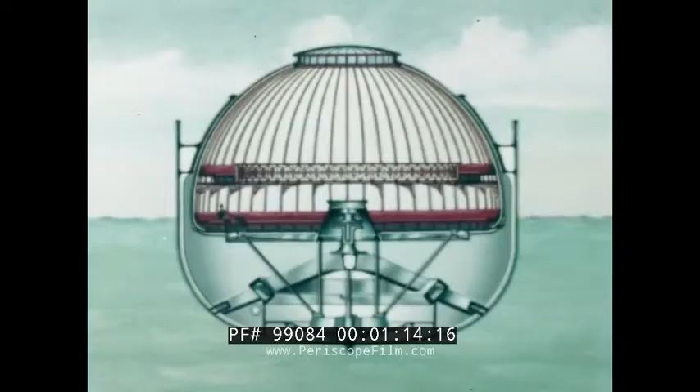Practical invention was Bessemer's answer to any problem. He was a bad sailor, so he produced the remedy, a passenger saloon that remained upright however much the ship rolled. It was not a great success, but at least it was evidence of his imaginative brain.

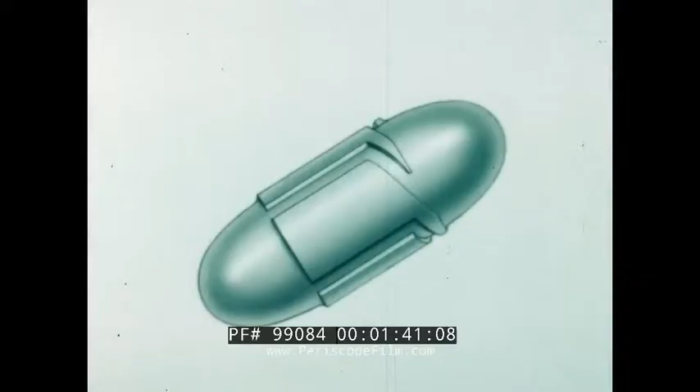He was 41 when the Crimean War began, and he gave his mind to artillery problems. He produced a shot that could be revolved by the exhaust gases through the smooth-bore cannon of the day. It was grooved, and Bessemer showed its effect with a model.

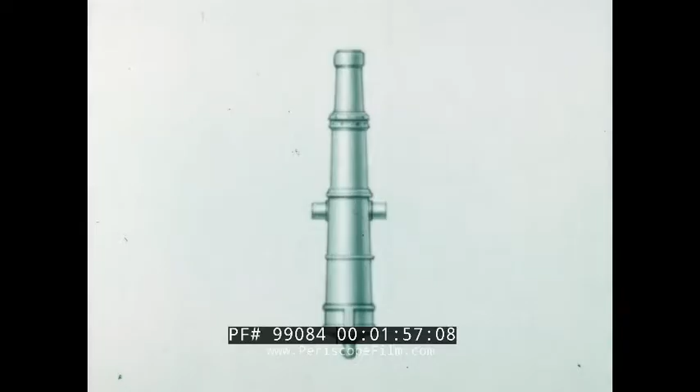The principle was sound, but the iron guns of those days could not stand the increased pressure. Bessemer's reaction was to find a stronger metal, which he cast into gun barrel molds. He was turning his genius to what was to become his life's work, steel.

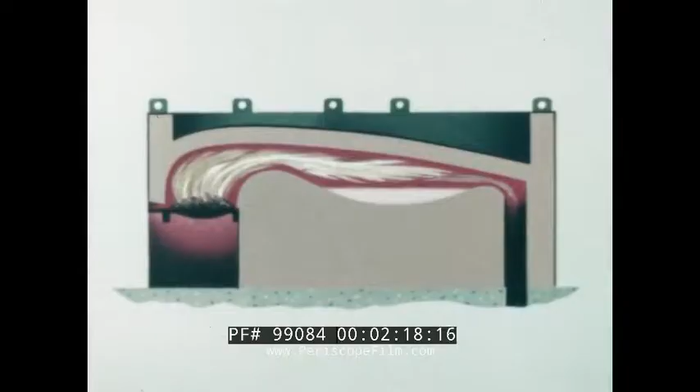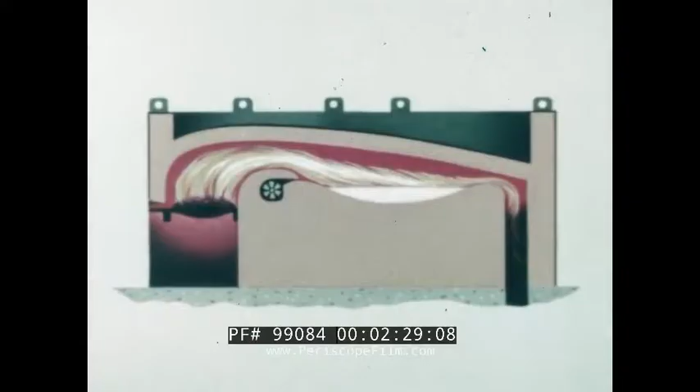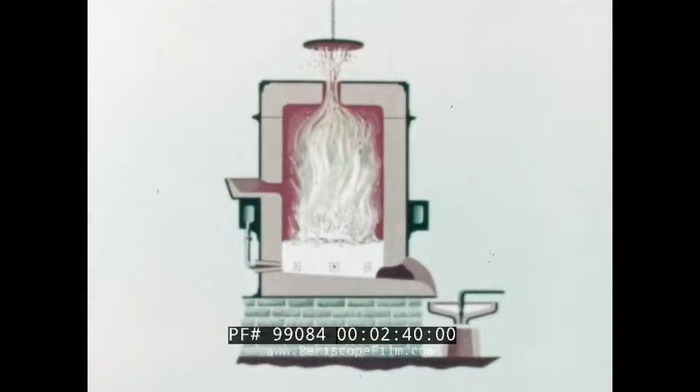Developing the old puddling furnace, he found that a current of air blown over the surface of the metal not only raised its temperature, but helped to remove the carbon and other impurities that made the iron brittle. Soon he was blowing air through the molten metal and found that this by itself produced enough extra heat to complete the refining process. Then, by putting back a controlled amount of carbon, he could produce what he'd been working for, a metal that was hard and strong without being brittle.

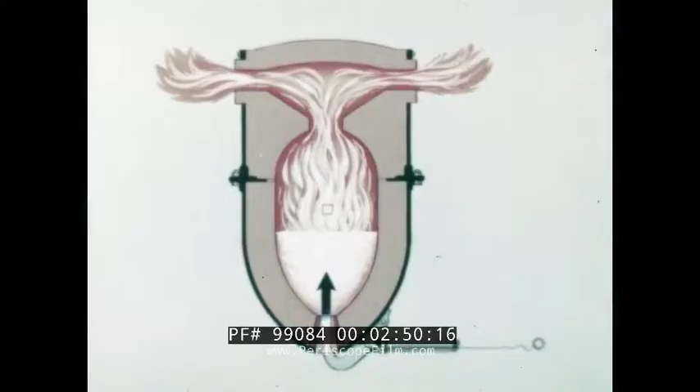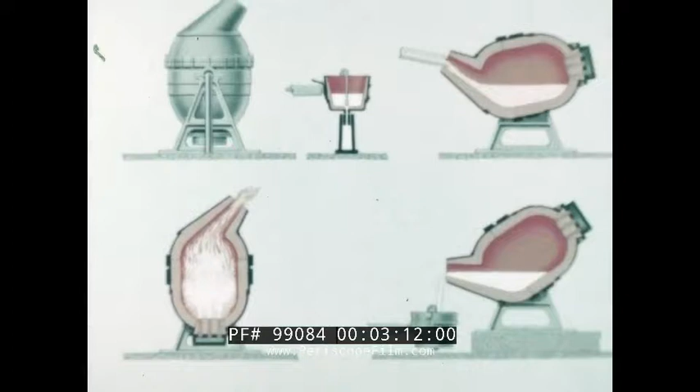Still, he was not satisfied and continued with his experiments. By trial and error, by adapting his old ideas and devising new ones, he eventually developed the converter we know today. He could make steel, acid Bessemer steel, stronger and cheaper, more quickly and in greater quantity than it had ever been made. And he gave Britain such a lead that within a decade, she was producing more steel than the whole of the rest of the world.

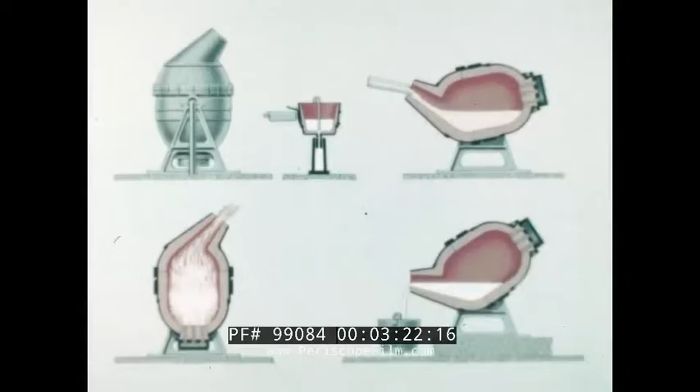His announcement of his original principle 100 years ago is seen now as the beginning of the steel age. Bessemer had his failures. He also had help from men like Mushet and Göransson. But his principle was confirmed here in the Cumberland Hills, where he found the pure hematite ore he needed. A rich countryside indeed, with such beauty on its face and so much treasure in its heart.

Workington is my town, a town built on iron. It stands alone between the hills and the sea. Maybe that's why we're an independent, self-contained sort of people. Like many industrial towns, it's a mixture of old and new. Older terraced houses and newer spacious estates.

Proud of our past and confident in our future, we are generally considered a lively, friendly people. 30,000 of us, living, working and playing together in a community built on our Bessemer heritage. A heritage that has transformed the old ironworks of yesterday into the fully integrated iron and steel works of today.

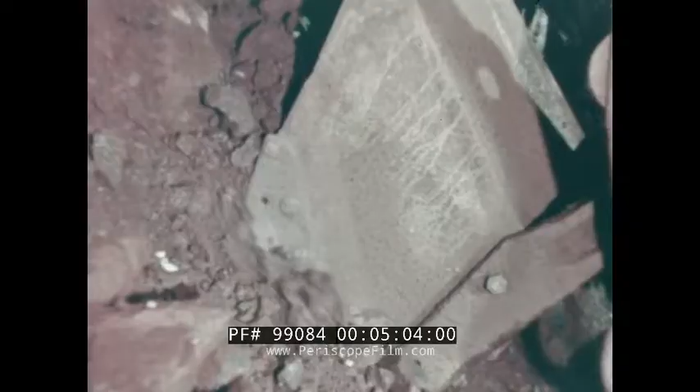To maintain their full capacity, we have to bring in to our own docks raw material from other parts of the world. Yet the basic foundation of Workington still lies under the foothills of the Lake District, where the pure hematite iron ore, which Bessemer sought a century ago, is still being mined.

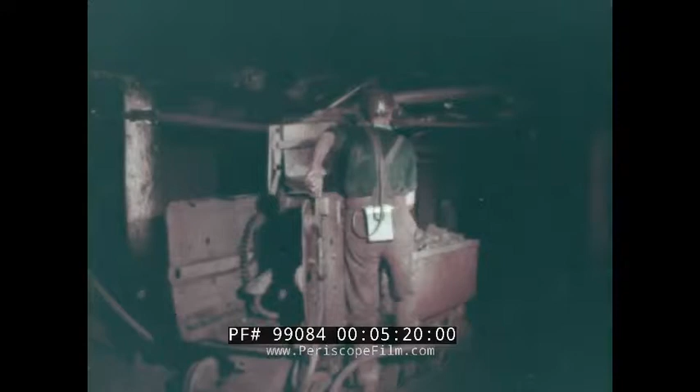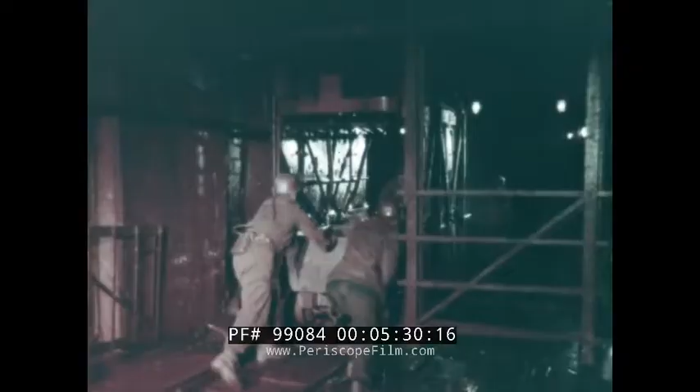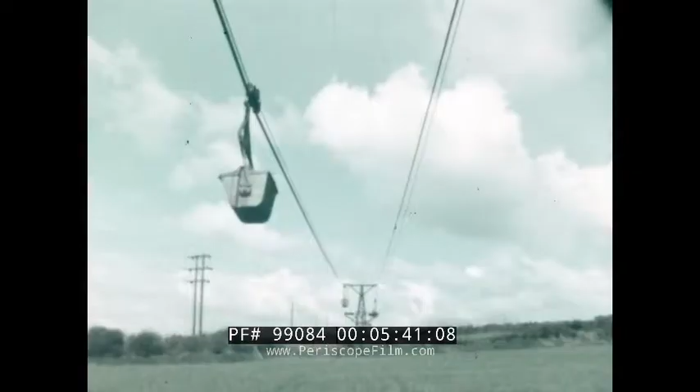After it has lain here for many thousands, indeed millions of years, it gets a rare blow of good Cumberland air on its way to town.

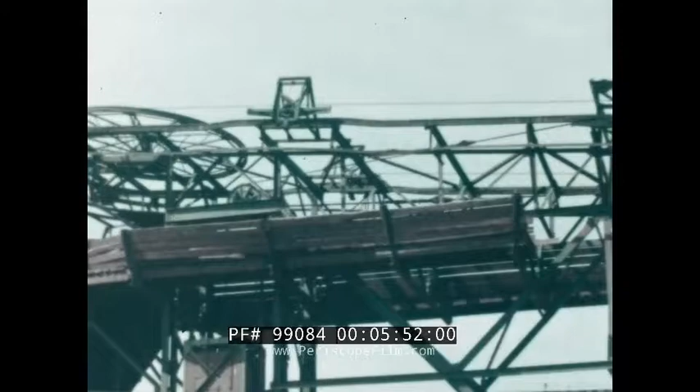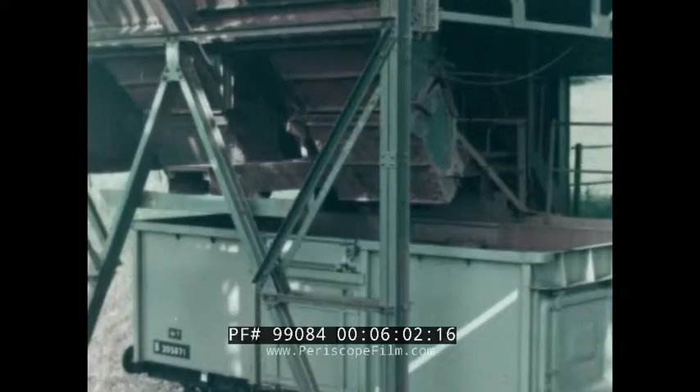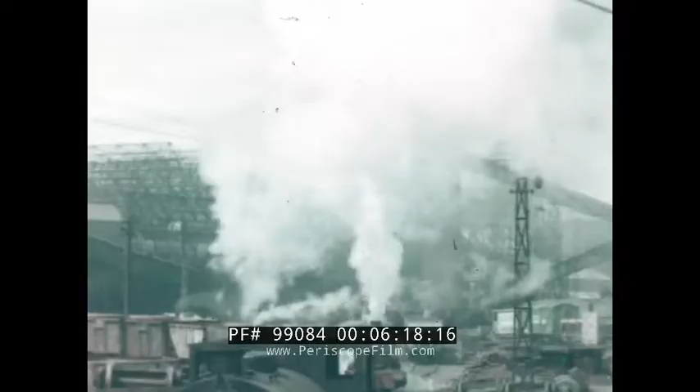In addition to our local ore, other hematite ores are brought from Africa, Sweden and Spain. From mines and docks, there's a steady flow of ore for the blast furnaces. Of course, ore alone does not produce iron. It needs coke, high-grade coke from Cumberland coal, and ovens designed to suit the coal.

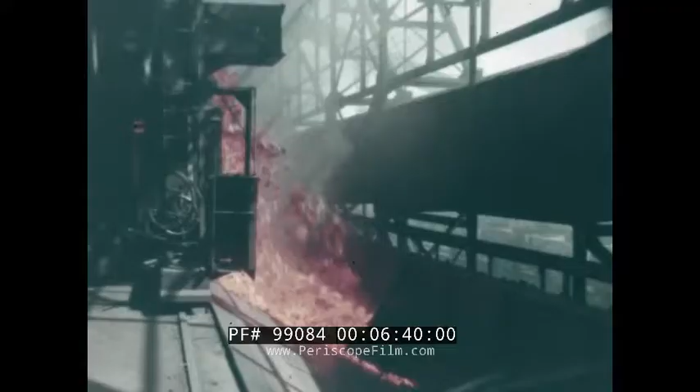Over 6,000 tons of coke a week are produced in 2 batteries of 64 coke ovens. And it all has to be taken along to be quenched under sprays of water.

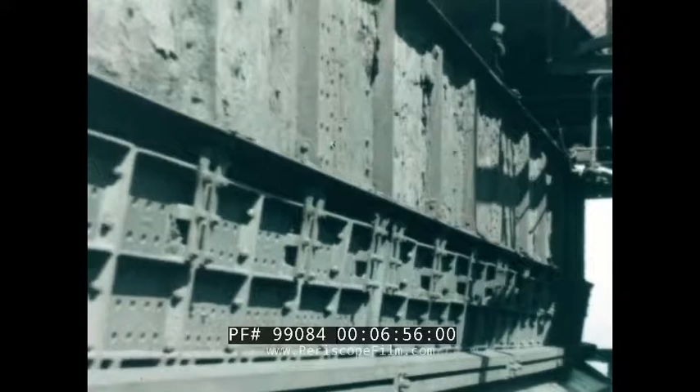The steam cloud formed by the cooling coke is a familiar sight to the townspeople. They know that the coke is going to the blast furnace to be mixed with lime and crushed ore to produce more iron.

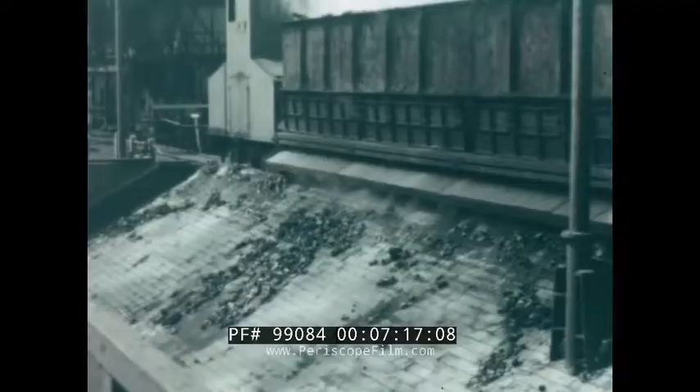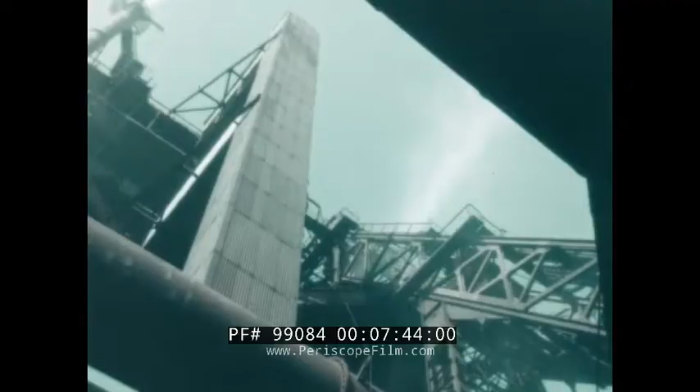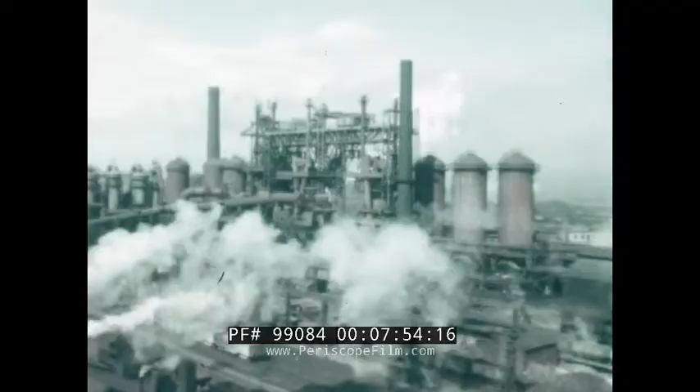The 3 ingredients in weighed and measured quantities go up to the sky in skips. Three blast furnaces working continuously can produce 9,000 tons of molten hematite pig iron every week. Every 4 or 5 hours, a furnace is tapped. The molten iron runs out, and the mastery of man over metal begins.

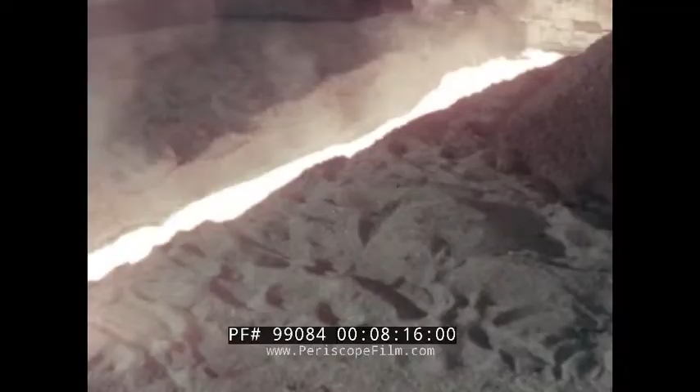On the skill of the blast furnace keeper depends the success of each tapping. For this is not only the story of hard-won metals and the white fury of furnaces. It is also the story of men who have been born and bred to iron and steel. The men who will control and shape this flowing mass until at last it takes its destined form.

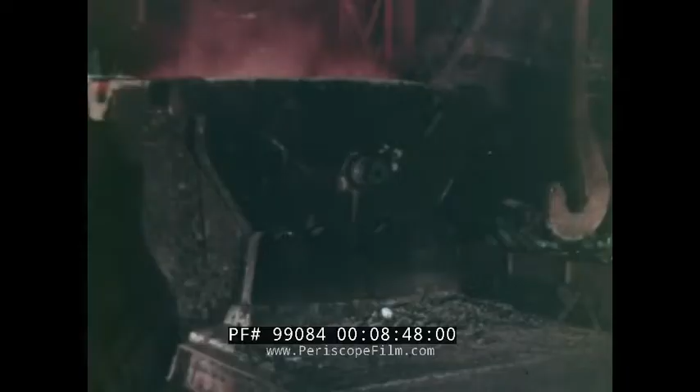Movement control is essential here. Everything must be put in its right place at the right time. From the furnace, the molten iron goes to the Bessemer shop for hot storage. High up, the crane driver looks down and takes charge of the ladle to raise it to the mixer.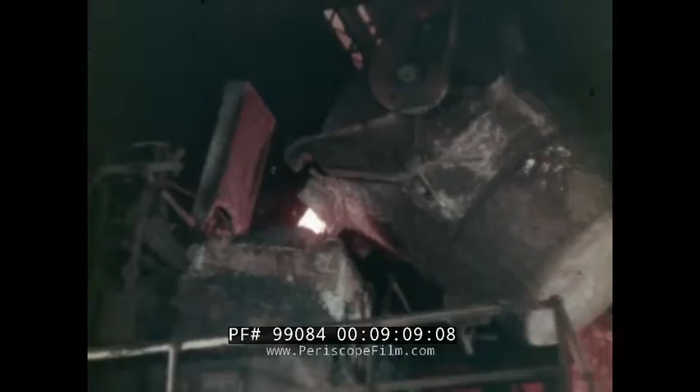The mixer holds 400 tons of molten iron, literally in hot storage. By mixing casts from the blast furnace, it levels out any variations between them. So a uniform quality of iron can be sent on to the converter.

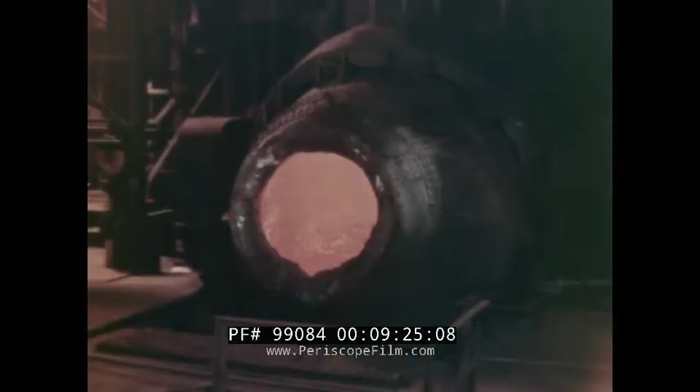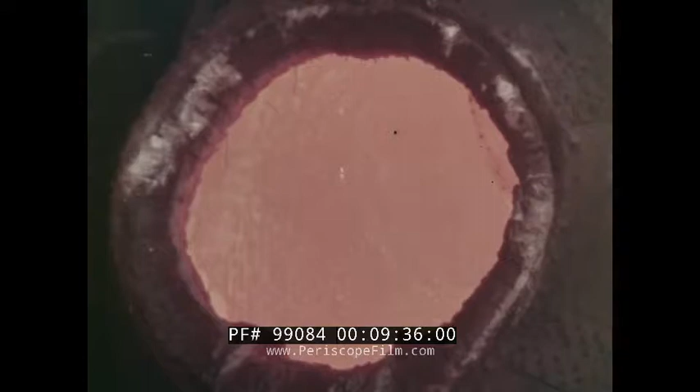The Bessemer converter is a steel shell with its mouth set at an angle. It is lined with silica brick, a chemically acid material, hence the name acid Bessemer. Through these holes, or tuyeres, air is blown under high pressure.

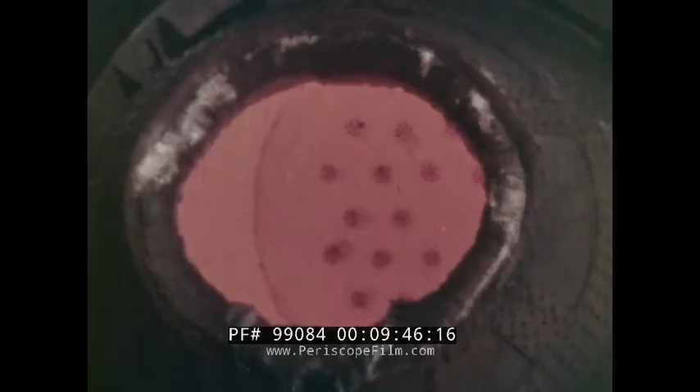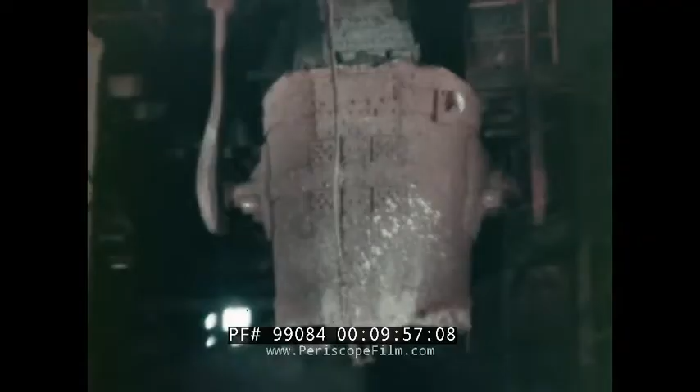The blower, in his cabin opposite, is the kingpin here. He signals when he's ready for a ladle of iron to be brought from the mixer. Indeed, he times every move to keep production flowing smoothly. The shape of the converter allows it to hold the molten metal during filling, so that it is clear of the tuyeres.

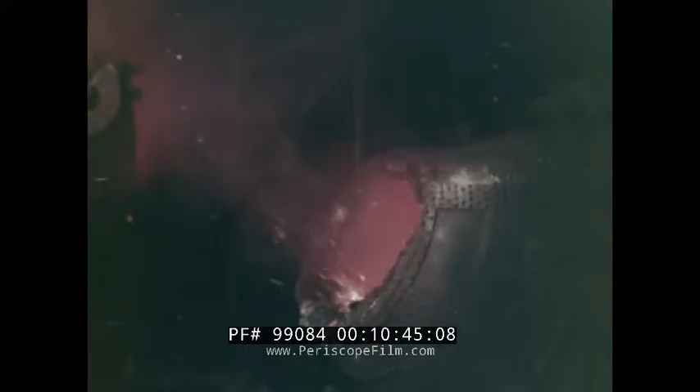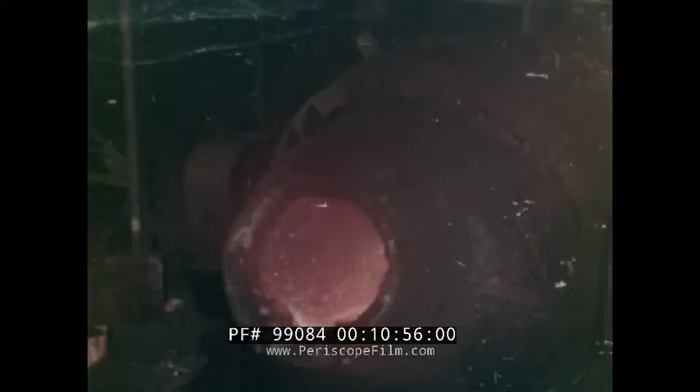When the 25 tons of molten iron is emptied into the converter, the blower turns on the air. The blow has begun, and the air blast sweeps from the tuyeres across the surface of the metal. Though he has many gauges and instruments to help him, the blower's experience and cool judgment will guide the furious clash of air and metal. When the air is blowing at full blast, the converter is tilted up.

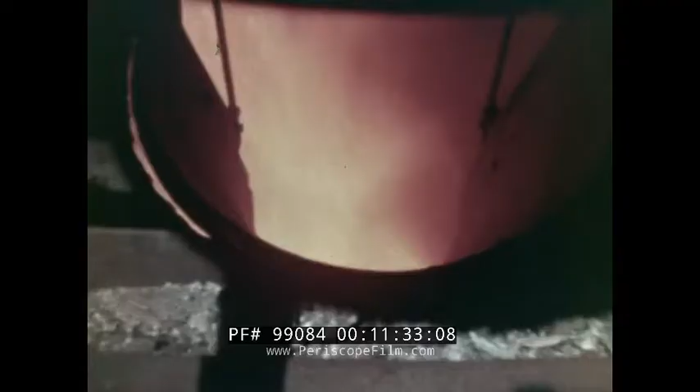The air is going through the metal now and starts to burn out silicon, manganese, and carbon. Keen eyes are fixed on the flame, its changing color indicating what is happening inside the converter. Scrap is used to control the temperature of the molten metal, a vital factor throughout the whole of the blow. Rocking is the blower's version of shake the bottle. It helps to melt and mix the scrap.

The gradual change in the color of the flame means that the silicon and manganese are burning out. As these elements burn, the temperature shoots up and the carbon also begins to burn. Soon, the oxygen in the air, combining with the carbon in the metal, forms carbon monoxide. The result is a fierce flame burning at the mouth of the converter, a warning signal to the blower. Now is the critical period when the flame turns white. Every eye is concentrated on the flame, for the moment to end the blow, when the carbon is finally burnt out, must be judged exactly.

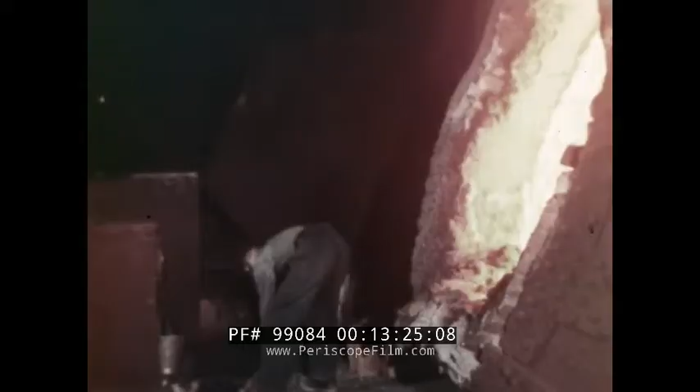The fury of the blow is spent. The molten metal inside has become almost pure iron. To make it into steel, a controlled quantity of ferromanganese is added first. Next, an alloy of iron and manganese, called spiegel, is poured in. This increases the carbon content and turns the molten iron into steel of the right analysis. While the molten metal is being poured, a further addition, ferrosilicon, is charged to the teeming ladle.

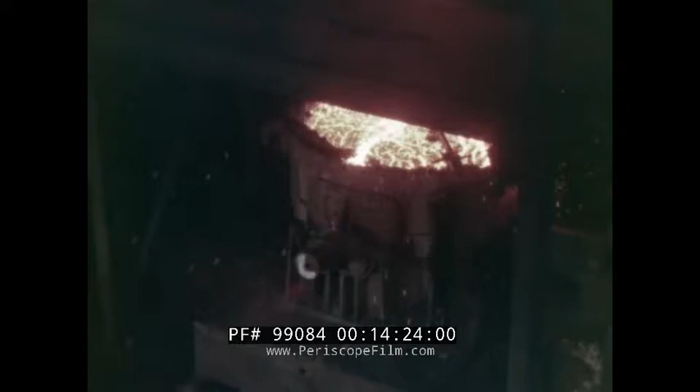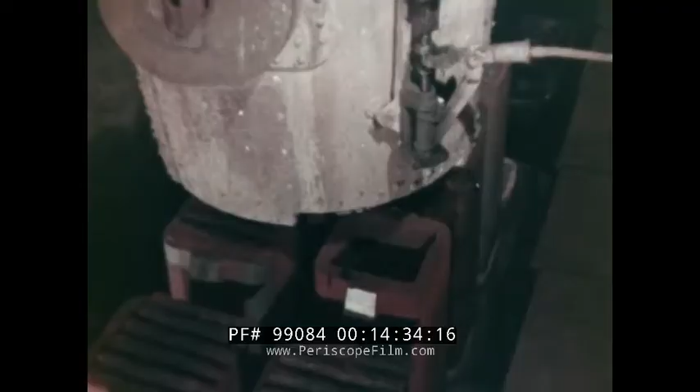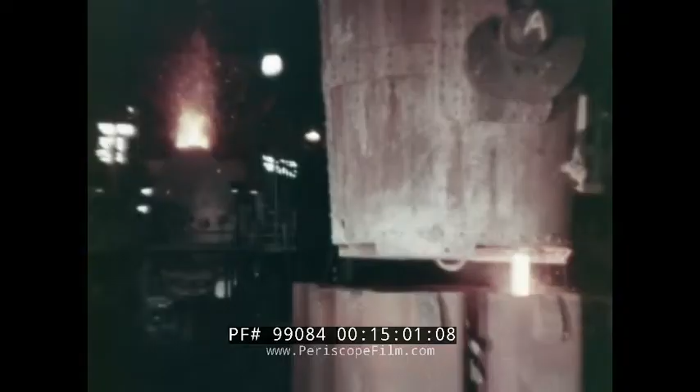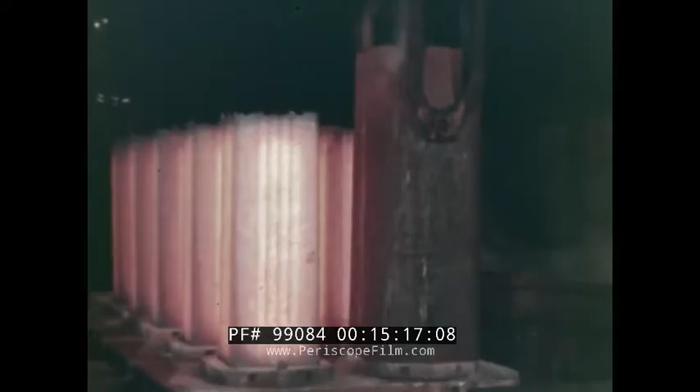Man still controls the flow of metal. Now he must give it a solid, practical shape, one in which it can be worked in the rolling mills. That solid shape is obtained by teeming the steel into ingot molds. You can see here the result and importance of movement control. As the molds are filled, a second converter is already being blown. Further on, molds from the previous teeming are being stripped.

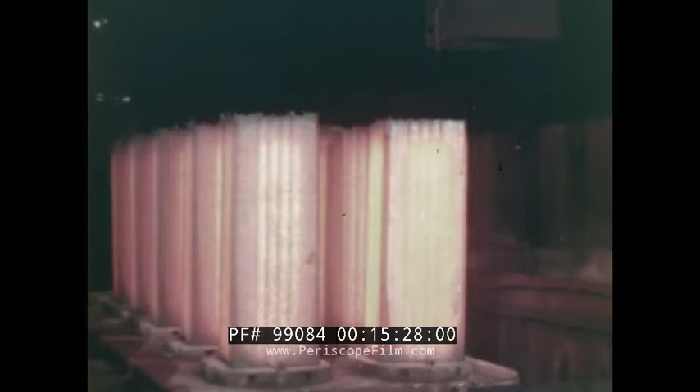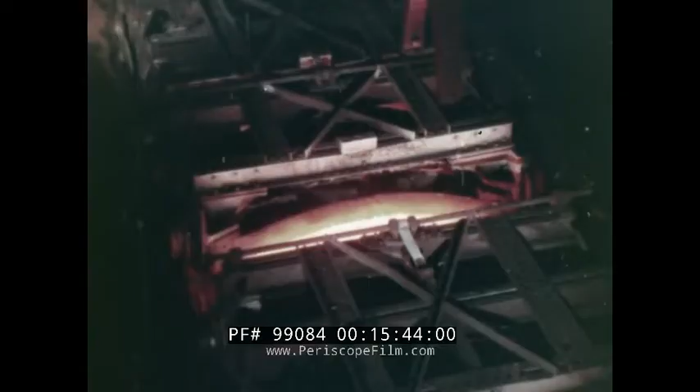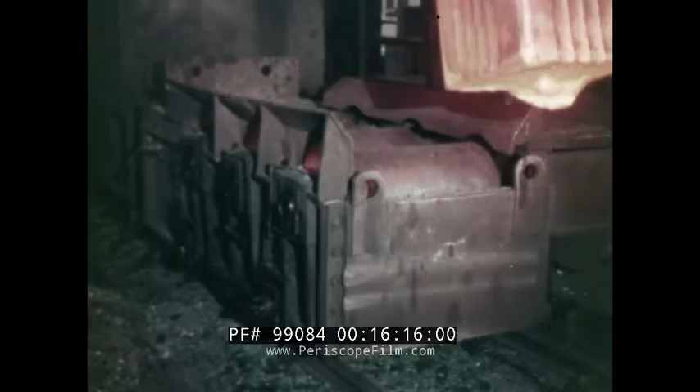These go to what are known as soaking pits, which already contain ingots stripped earlier. Soaking means exactly what it says. The ingots are literally soaked with heat for about 2 hours, reaching a temperature of 1200 degrees centigrade before they are ready and malleable enough for the rolling mills. The flame of the converter, lighting up the Bessemer shop, is the very spirit of the works, always ready to draw our eyes and our breath.

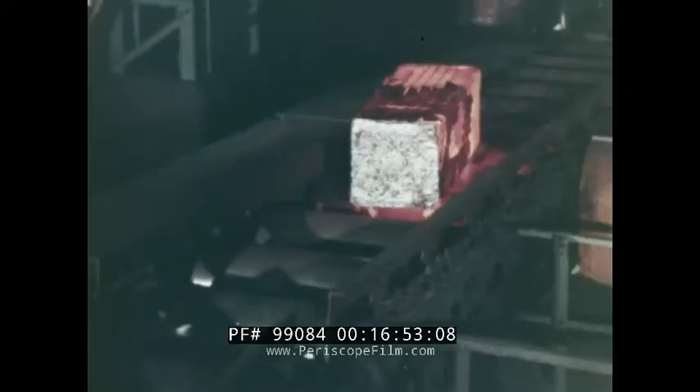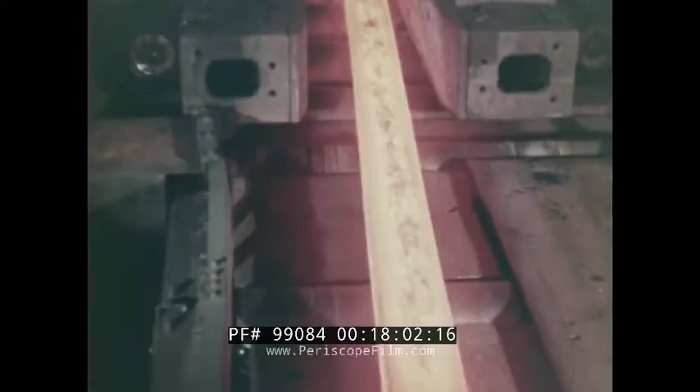The ingot will become a steel rail, and the quaintly named chariot takes it to the cogging mill for the first stage of its transformation. Every backward and forward roll and turn will slowly shape this ingot into what steelmen call a bloom. Above the mill, in the pulpit, men are still the calm and patient masters of the metal. With quiet concentration and perfect understanding, they roll the steel to exact size and of right strength and internal structure. The ingot is now a bloom to be passed on for further rolling.

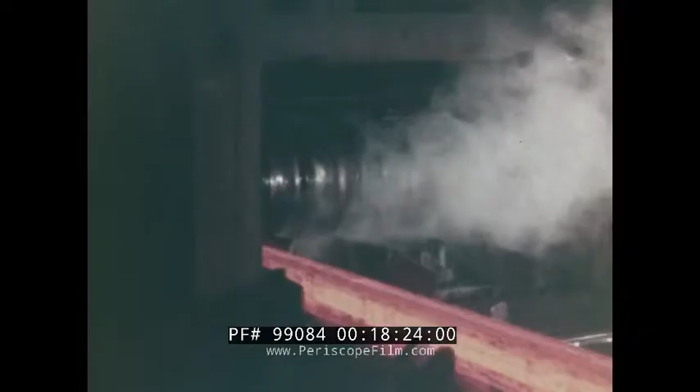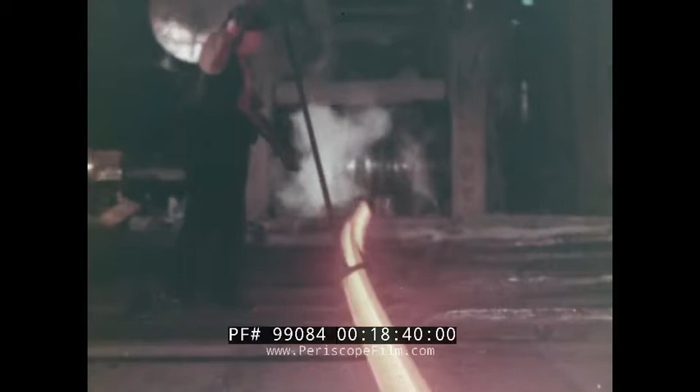They call this the roughing mill. The bloom would probably call it much the same. With each pass, the bloom becomes longer and thinner, and soon it begins to take on the shape of a rail. Roughing being completed, now over to the finishing mill. Men still take a hand in turning the rail, for it has to be rolled sometimes on the flat, more often on the edge. Even the rail seems pleased with its progress, wagging its tail as it passes through.

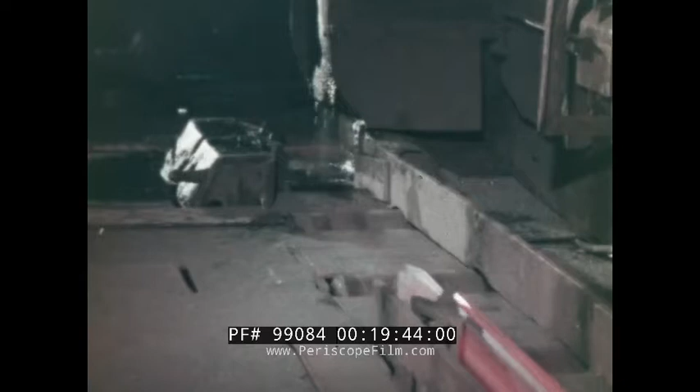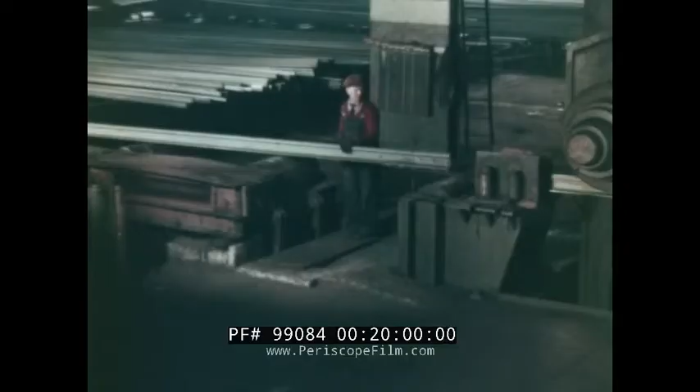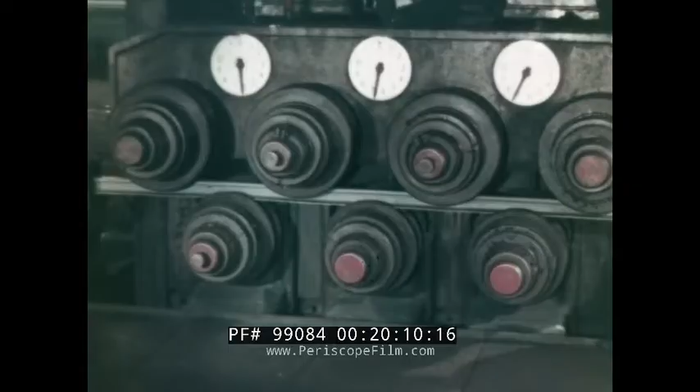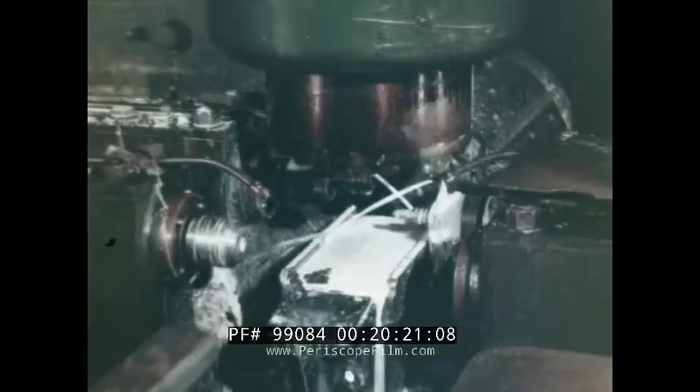In cutting to rough length, allowance is made for contraction during cooling. It can contract as much as a foot. When the rail is a cold 60-footer, it has to be made perfectly straight, so another rolling process smooths out any irregularities. This machine performs the final operations, cutting to exact length and drilling holes for the fish plates.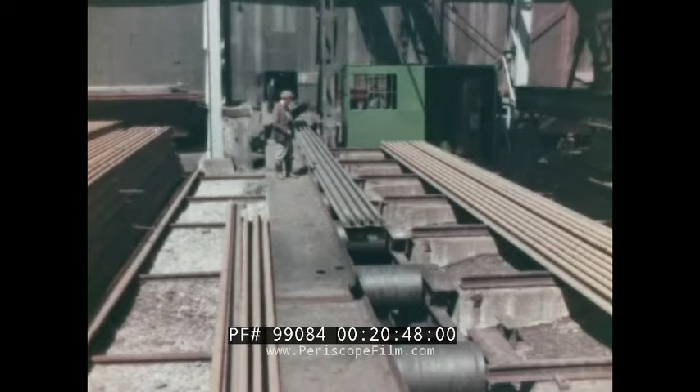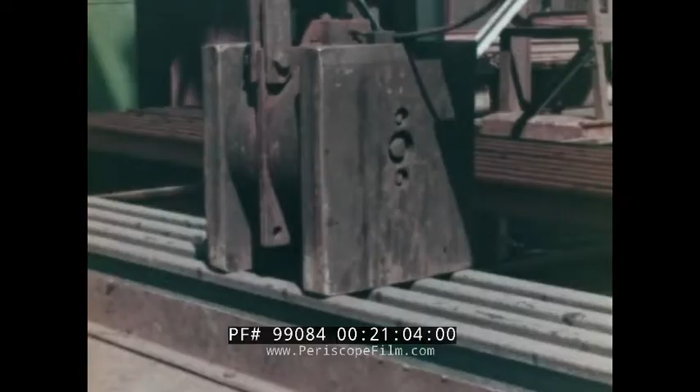The rail has come a long way, from the ore mines through the blast furnace and the converter, the soaking pits and rolling mills. And how this sight would have delighted Henry Bessemer. For these and every rail produced here are made by his original steel-making process, which he patented a century ago. At Workington, we like to feel that we have repaid a debt. 100 years ago, Bessemer gave us the chance to make full use of our natural wealth and our inherited skill. On that, we have built a great works, a fine town, and a good way of life.

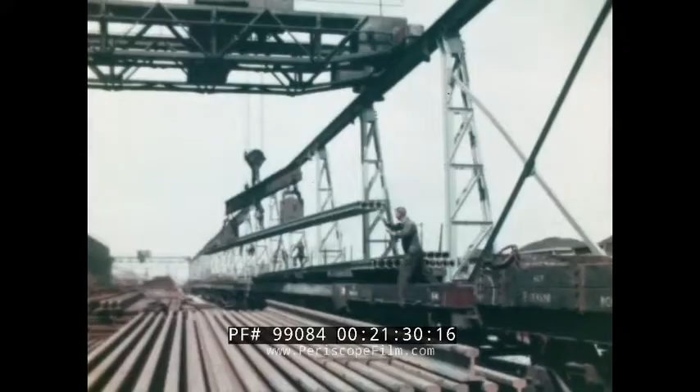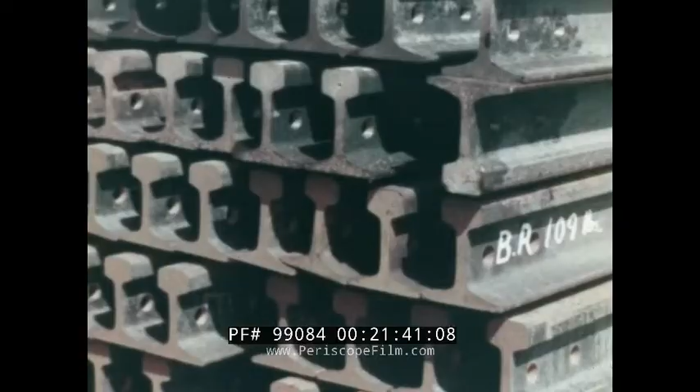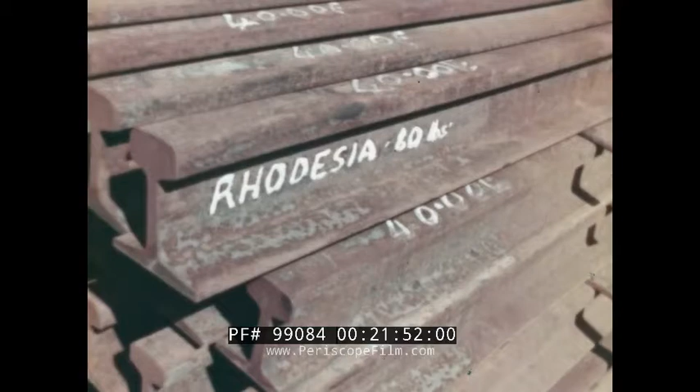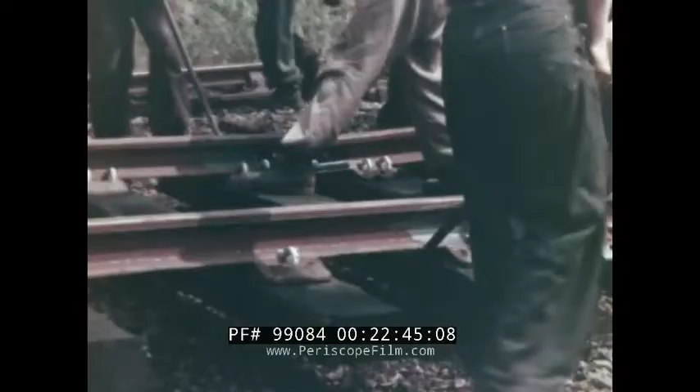On railways in Britain and all parts of the world, you will find rails made from acid Bessemer steel, a tribute to the genius of the man who invented the process. British railways, one of the busiest systems in the world, use 250,000 tons of new rails every year. As trains become faster and loads increase, these rails will be ready to take them.

Henry Bessemer, a century ago, may not have foreseen the great railway systems of the world today, but he lived to see the beginning of the steel age, which, more than any man, he had made possible. Its continued growth is a fitting memorial to his genius.